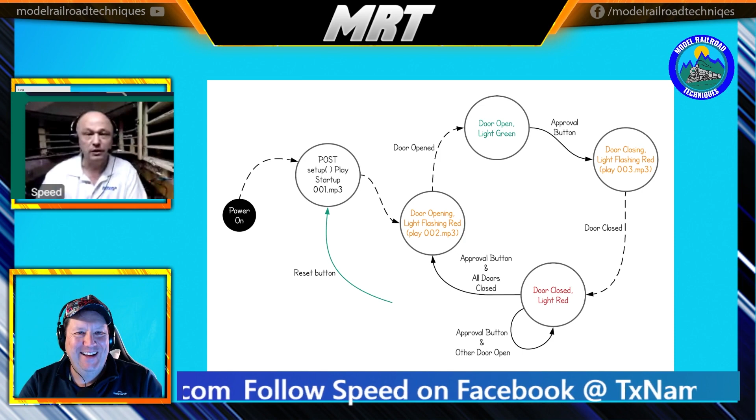Well, so good evening all. I feel quite comfortable here in my NMRA-X studio. Daz even set up Wi-Fi for us. At NMRA-X, I am kind of responsible for the scheduling, so I always put at the bottom of my email, host, scheduler. So if you are willing to give a clinic, you know where to come to.

And we probably schedule clinics out within the next 3 months. We still have slots open for February and March, not knowing when this is going live, but contact me anyway. Probably in the next month or so this will go out, so probably late January, I think. I might grab your email later and we'll sort that out, and I'll put that link below, so if people want to reach out to you, we'll go from there.

Well, we have to preface the giving of clinics - it's going to cost you an operating session. So for an operating session, I'm willing to drive to places. Anything technology-wise, anything even from soldering - willing to teach people how to solder, how to open up an Arduino out of a box, how to change the blinking light to something that blinks a little faster, make a traffic light, make an arc welder, do a little fireplace. JMRI, how to set it up for operations, how to get your turnouts to move - all those kind of things that people think are hard to do.

Well, we go the step-by-step way to show you - an introduction to electronics. Yeah, sure.

And also I see you're the treasurer of the Lone Star division of the NMRA in the United States. So shameless plug, away you go if you want to push the Lone Star. Well, it's the place to be, right? Hot in the summer and not so hot in the winter, but no snow.

A bit like Adelaide then, like South Australia anyway. Definitely no snow, just dreary and cold. But so lovely. We moved here from Boston as soon as we could, literally. Yeah, okay, that's northeast, isn't it? So they'd be very cold right now.

So, okay, how long have you been sort of involved with the Lone Star? 3 years as treasurer, 3 terms as treasurer. When I moved from New England down here, within the first year I was involved in the local division. So that would have been now 10 years already. Wow, amazing how time flies.

Speed, you obviously go by another first name, which I promised I'm not going to mention here, but you said you'd give us the backstory. I like Speed Muller, I think that's got a certain sort of edge to it. So what's the little backstory to that?

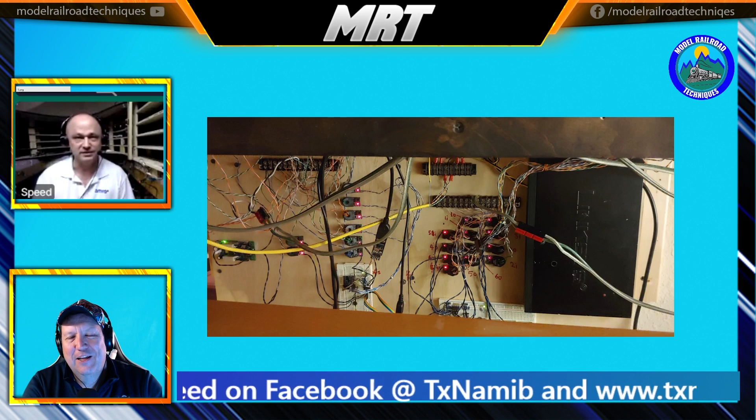So I was born in Southern Africa as Gert Johannes Muller. But in America, they shorten Gertrude into Gert, so all my junk mail shows up with an MS or MRS in front of it. Not my kind of thing.

So when I moved to Texas, I helped a guy I'd never met before on his S scale layout with JMRI. What I didn't know is that you're not allowed to touch the computer because the dispatcher is the only guy that touches the computer. By the time I had three lines coded in, there was a crowd of people behind me, and he tapped me on my shoulder and said, I can understand that your name is a problem here, but you can type faster than we can read.

We're going to call you Speed. So the crowd took that as the introduction: 'Hey, say hi to Speed.' And it stuck. I like that. So from now on, that's what I've been told to call you, I think it was Gordy who said make sure you call him Speed, and I will honour that. So that's a great little story.

Thank you. So, history. I'd like to know people's history in the hobby, sort of where you've come from to where you are now. Well, in Southern Africa we had these things called sanctions, and not sure how, by hook or crook, we always got the products from Lima in Italy, and they would make things like the Blue Train and the locomotives and cars that go in and out of Cape Town.

So as a 6-year-old, you get a present like that under the Christmas tree. Mine was a little harder than that because we didn't have electricity - we would only have a generator for an hour a night. And if you're in boarding school, you don't have any trains or toys there either, so only on weekends you get 2 hours, Saturday night and Sunday night. That's how mine started.

Went to college in South Africa - trains kind of stayed at home. We built a new house on the ranch, so I got a big room in the old house and built a big layout there with pantographs, because everybody knows the Blue Train is an electric train. I spent probably most of my life in model railroading, building pantographs and making trains run off overhead wires.

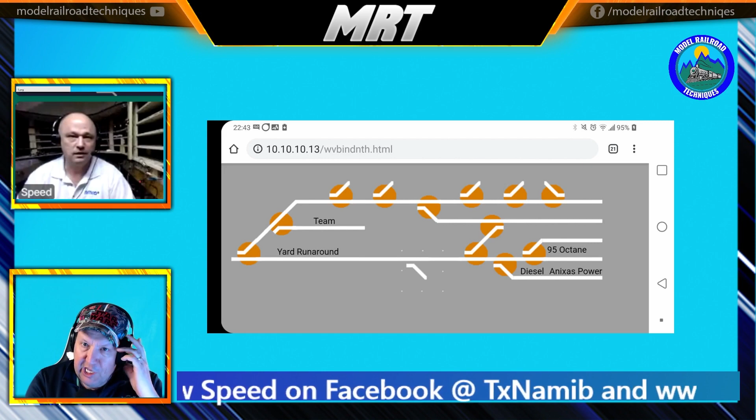So N-scale, more out of necessity, because you didn't have the size of space you'd need for a pantograph layout, as you were saying. So what's the name of your current layout that you're building, and tell us a little bit about that.

It's TxNamib now, and it's in a room that was added to the home before we moved in, on top of a 2-car garage. So I have 20 by 20 feet plus the entrance in the hallway. There are some pictures of the entrance as well as the room, and it's a 2-deck layout.

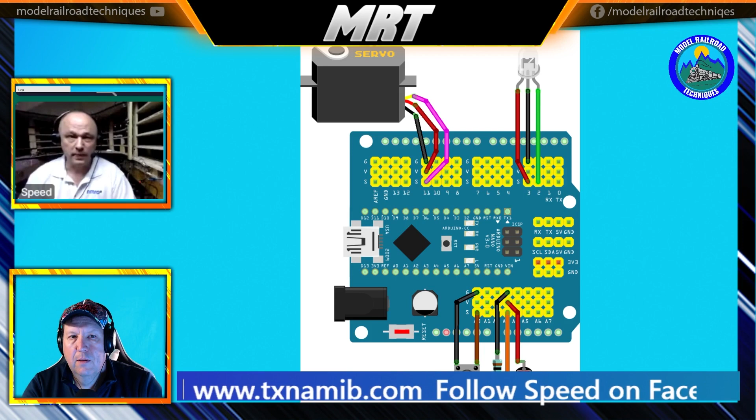I'm sitting inside the helix, which is a 4x8 plywood sheet cut with a hole in the middle, and I always wanted the dispatcher to sit here. So in front of me are 2 monitors - but we're fortunate enough now with today's technology that we're actually using remote dispatchers just like the real railroads do.

So single main line everywhere except for in the helix, because it takes the longest to go between these two towns at the top and the bottom. So I thought, in order to save you some 12 minutes waiting for another guy coming down, how about we get you going on the other main line, like in Southern Africa, left hand running, or probably Australia too, right?

Correct, yep. So everywhere you split somewhere on the siding, you take the left side. Enough staging on both ends of the railroad so that we can park 16 trains in Walvis Bay and 24 trains in Windhoek, in case we get a guest operator that just wants to run a train through the layout. Sure. But it's built and designed for operations, and therefore the scenery is coming a little later.

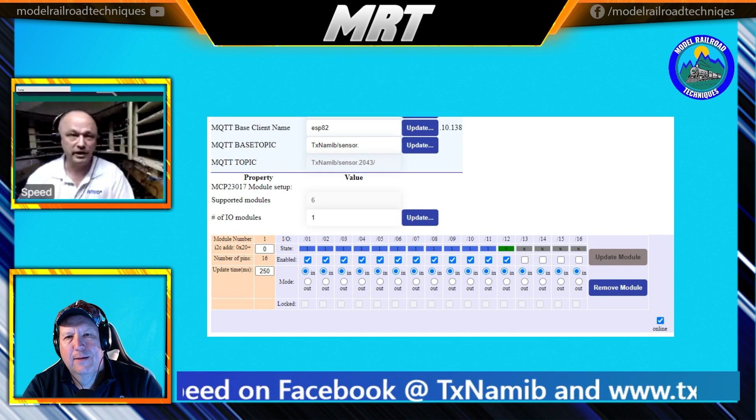Like Daz asked for some pictures and things, and I was like, well, this is going to be a dry interview if there's no pictures of scenery. So most of the scenery that you see in the slides coming by were actually done by friends of mine. It's not my handiwork, it's their skills that I'm using.

Sure. So, what's the DCC system? What are you looking at?

Yeah, okay, fair enough. So I sort of gathered it was NCE because what's the BD20s that you're using for occupancy detection. So yes, and that's inherent to obviously NCE, so which is great.

So obviously you've touched on JMRI a little bit. I know we're getting ahead of ourselves here. So obviously the layout is purely built for operations in mind. So we'll talk about the virtual and the remote operations, which is something you're quite heavily into as well, as my understanding. So take the COVID rubbish out of it.

What does a typical operations session look like pre-March of this year? So how many operators and how do you go about running your trains?

So the operation started beginning of November last year, because Houston, the DFW area, and Tulsa has a 3-year rotation. And I realized that if you don't sign up for one of these events to host, then you might not get something done. So last April, I decided that this November is going to be the chance to invite people over. And I literally slept 4 hours a night until November the 2nd.

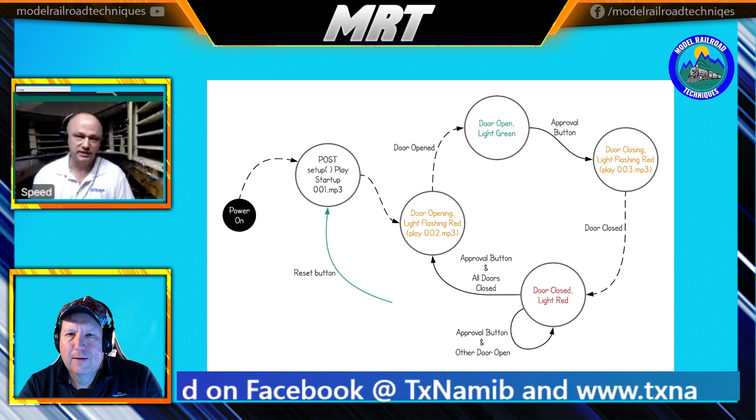You are going to be a yard guy. So that was the initial design. There's about 3 or 4 towns and industrial areas that we have not completed yet. So I could eventually have maybe up to 8 operators.

Wow. And then we also have the staging yards that's not in use yet, where we run trains from outside the layout, coming from South Africa to a place on the layout where you can then either drop the train or do some work. Sure. So it was planned to maybe maximum 8 guys and then a dispatcher here in the helix to control the system.

Yeah, lovely. So the method of moving the trains around is JMRI operations, or is that how you're doing it?

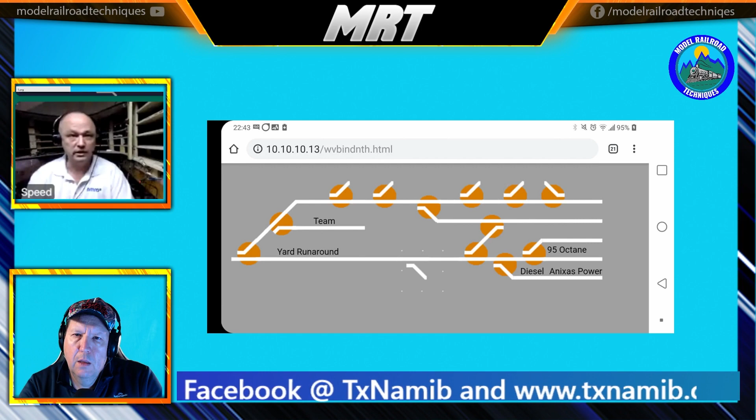With the switch lists I'm working on a car forwarding system where you would select your skill level when you walk in. So if you're a novice, then you will only pick up green cars with trailing point moves. And if you are an expert at this, then you would have to turn a car around in the town prior so that you could deliver it with the left door at the platform.

Right. So that whole camera system is still in development. Yeah, and until then, to make things run and test out turnouts and things, I have a computer-typed switch list, which basically tells you what car to pick up where, and in the same line where you have to deliver it.

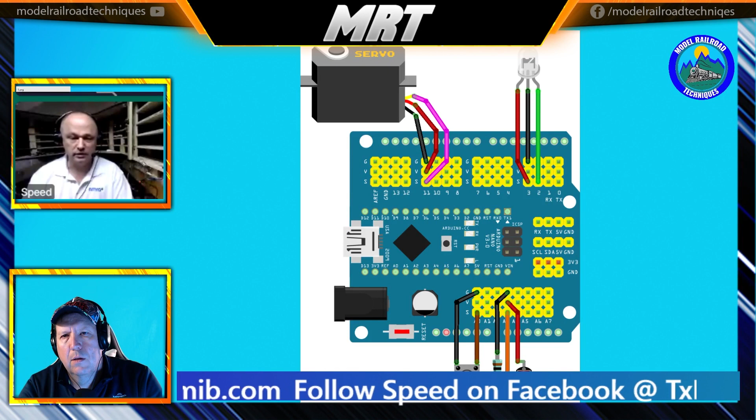So it's one of those brain teasers where you show up at a town and it says -3, because you have to drop 3 cars, but it doesn't tell you which 3, because earlier up in the list it showed where those cars were going.

But by the second session, you're over that fear and you know how it works. The intent is to move away from paperwork so that the only thing in your hand is the throttle, and you control and witness everything on the tablet in front of you. The tablet knows that train 101 and train 401 are in this town, so you select which train and it shows you which cars you need to move when you show up.

No, it's all standalone. The switch lists I give people now are all made out of Google Sheets, so I just print a new set and hand them out. I actually restaged the whole layout to time 0, so if you come here and operate the same position 4 times in a row, you're going to move the same cars 4 times. But by rotating you through the layout, because I know where you were last time, it's going to take 3 or 4 months before you do the first position again.

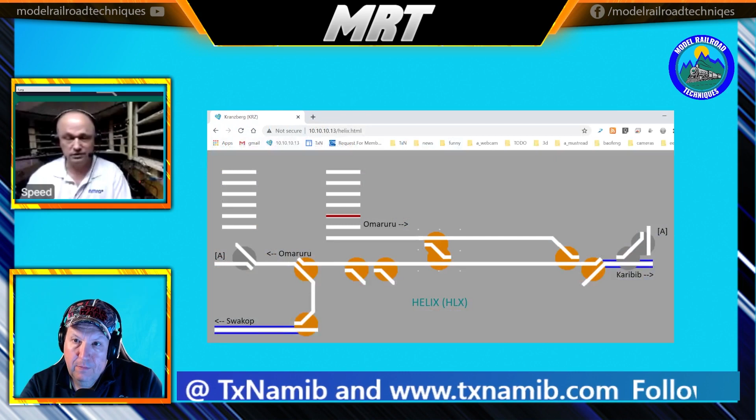And if there's anything like me, I would have forgotten by then, so I'd be asking what was going where. But the cars do go to places where they would have gone - it's not just any box car or tank car showing up at a milk factory. The appropriate cars are moved to the appropriate locations.

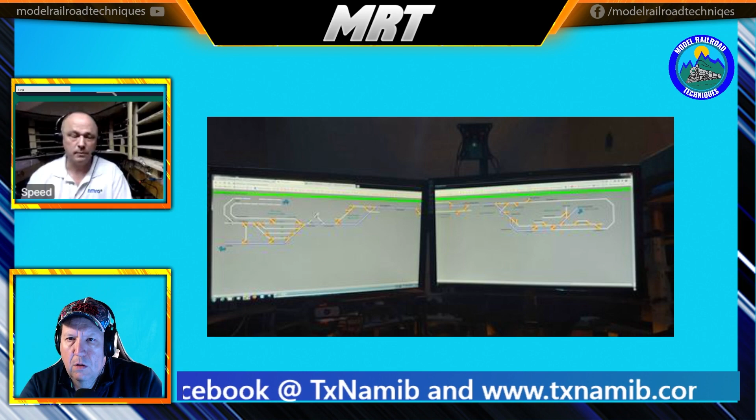Everything can be remotely controlled, but every town has its own little Android tablet that is looking at a website running on a Raspberry Pi. We're actually not using JMRI to control the turnouts, because the JavaScript code is sending out what we call MQTT messages - MQTT is an established protocol out there - and we're using that to talk to little Wi-Fi boards, which I think is up in the picture right now, to move turnouts.

I was actually going to ask you about your signaling system in the next 20 minutes or so. I just stumbled across this on your website this morning, and I thought, someone - I think it was Gordy who mentioned it. No, it was Martin Jenkins who mentioned it, saying that was rather a large rabbit hole for him to go down.

Well, I can show you how to do it for $1.50. Wow, that's fantastic.

So virtual and remote operations - well, obviously they're one and the same, as I understand it. What are you doing within that space? Obviously best case scenario was pre-COVID. You started operations in November. My understanding is you're a bit of a leader in this space, somewhere between you and David Aberles in that sort of vein, so how are you operating your layout?

I don't know about the leader part, but we at least have the dispatcher completely remote now, and we're setting the cameras up so you could also run the trains, slow them down, and stop them in places. What I always tell people is that operations is half the time you pick up cars and half the time you set out cars. Now, we all know that if you can back into a car, see it on a camera, and change the throttle to forward, then that car is hooked.

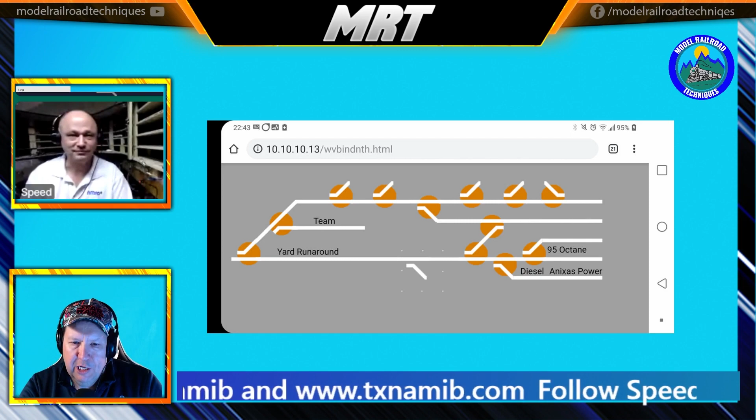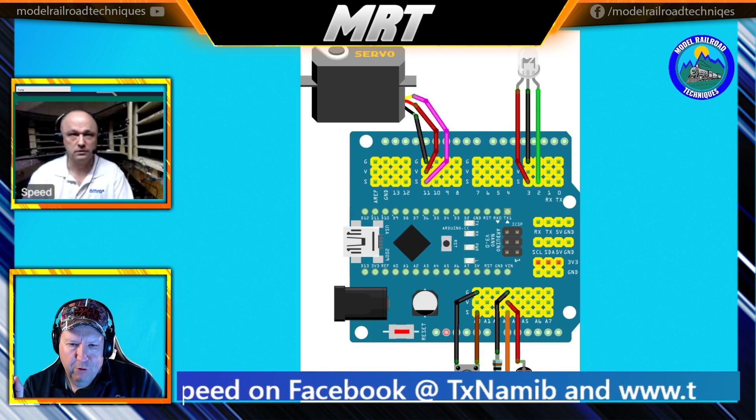So, in regards to the CCTV that you're using, there seems to be 3 schools of thought. I've seen the guys and girls at the Silicon Valley lines over in LA, over on the West Coast, closer to San Francisco I believe. So they seem to be doing camera cars, a flatbed wagon that's getting pushed around by the locomotive, or a dummy sort of locomotive. And then Marty is obviously looking at cameras of rail fanning type areas. And then following trains more around within JMRI, or whatever's tracking your occupancy, or a mixture of both.

So where's your layout sitting within that scope? So with my cameras monitoring the cars, cameras next to the track that's reading the cars as they come by, and cameras in the ceiling to track where that white roofed car is going all through the town. I would have it, at least that part already done, where you can monitor it from afar.

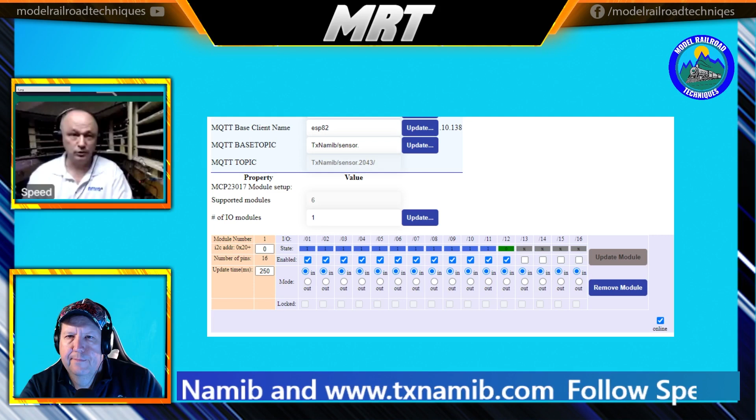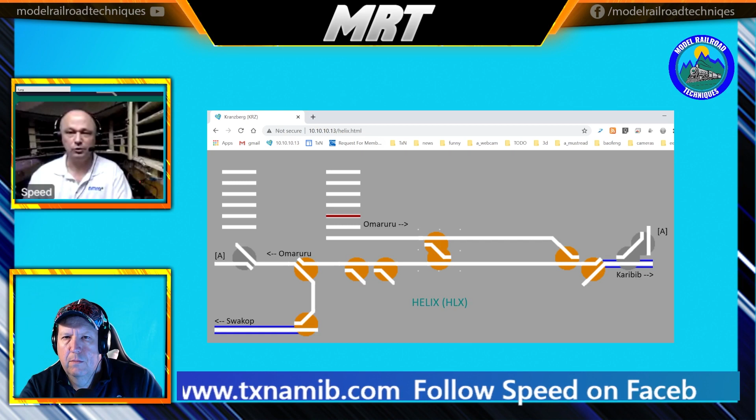Me and Brad were just discussing that this morning, where the question is quality versus—what's the word—do you want the nicest picture, or do you want the fastest picture? Some people want to see the scenery as they ride their train through the layout, so you need really good quality. But if you are operating the engine back and forth and need to stop it, then you need the frames to show up quicker, so that you have a feeling of how it moves. A beautiful picture every 10 seconds is not sufficient to run a train.

So a mixture of both, to answer the question, is what I'm gonna say. I run a program called Train Controller, which is the German brand. That's what I use to run through web servers. I've only just started touching the surface with the whole remote operation side of things.

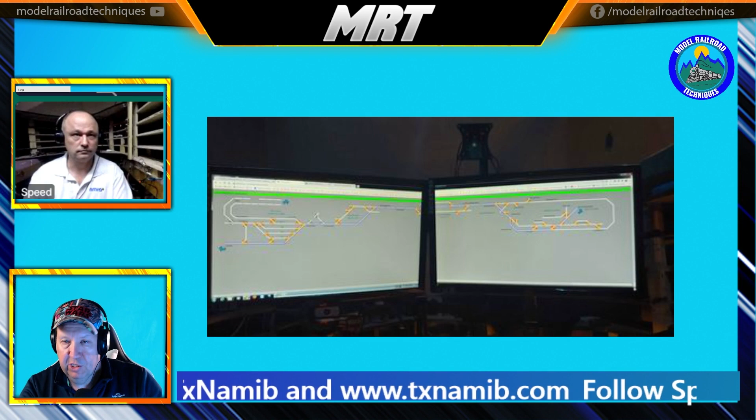I have sorted out a way that I can, because I run a bit similar to you. They're all web browsers, I don't have any control panels. They're all sort of soft control panels, no wiring to them. They're just a PC that sits on my local area network. I have worked out a way how we use the WAN side of things, so I can access my layout's computer from the outside world, so to speak. So that's sort of where I'm at.

I'm just starting to dabble around with some ESP32s, which young Marty got me into. I've also tried the Raspberry Pis as well. So which way I'm going to go with those, I'm not sure at this point.

The benefit of the MQTT system is that you add an external bridge to any other MQTT broker or server in the world, and then all those commands for changing turnouts and signals and picking up trains is automatically broadcasted to another server. So if you bring up the same web page on your computer, like the image shown now, then you can control the same turnouts that I can on the inside here.

So obviously Arduino is another sort of passion of yours. Besides the ESP32 cams, you dabble in Arduino IDE, which you flash the drives that way. I'm not very au fait with what you can actually do with Arduino, I'm just sort of scratching the surface with what can be done, just very, very beginner. So in layman's terms, for someone like myself who has no idea about it, what sort of things are you looking at with Arduino for the beginner to sink their teeth into? There's all the flashing light things.

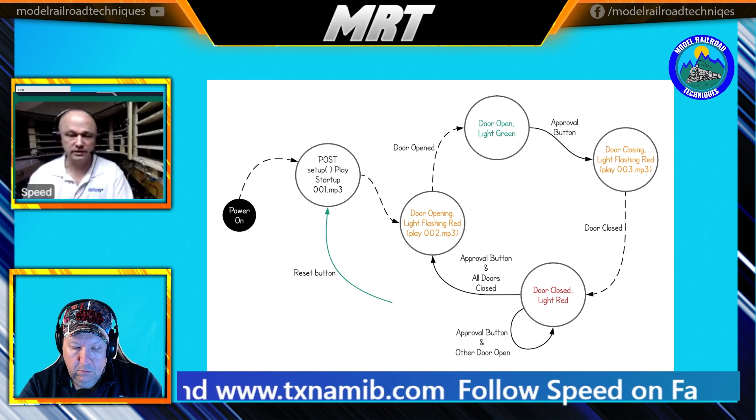There's recording light levels, temperature sensing, occupancy sensing, or anything else you want to monitor. You could do it with a little Arduino, which is just a tiny microprocessor that probably runs some 8-bit code.

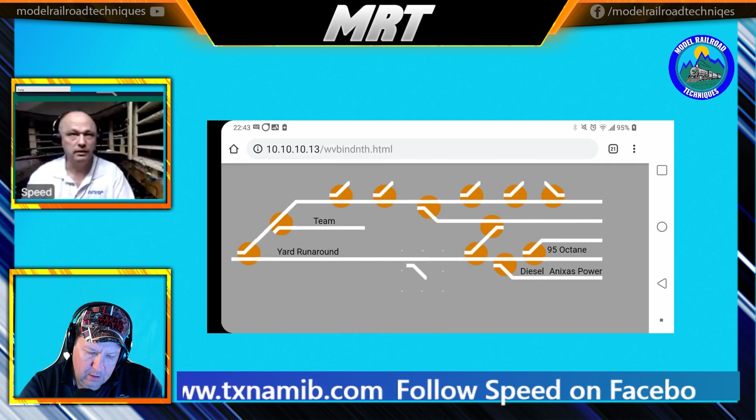So that's the simple thing. The unfortunate truth is that it's just C and C++ code. So if you really want to have some fun with it, go to the library and get a book on Introduction to C or Introduction to C++, and that will take you a lot further than you expected.

In any Arduino clinic that I teach beginners, the first thing you do is make sure the software is installed, and the device driver is installed when you plug it in, so you get a COM port. Then you'll notice the Arduino starts blinking by default—that's the application that's already loaded.

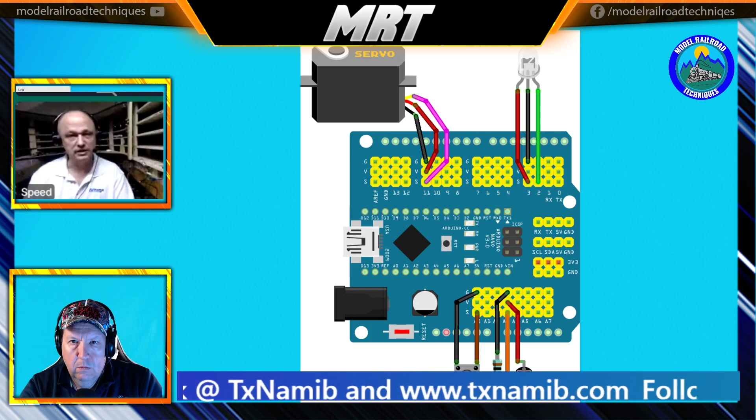So the first thing we do is change how it blinks—is it on for 2 seconds and off for a second, or on for a quarter second and off for 2 seconds, whichever way. Then we do the high five once you've uploaded that code change—you are now officially an embedded programmer. Well, not really, but you did program an embedded system.

Then when we go to the advanced class, we have to convince people that the delay function is preventing them from using all 15 pins to do separate things, because if you delay one LED by a second, all the others are also delayed. So you have to switch to a polling approach where you ask, is it time to change the LED? That's easy with the millis function.

Unfortunately, only 1% of the people who use an Arduino would ever write a line of code, so we have to keep that in mind—we don't teach everybody how to do Arduino if they have no intention of writing C programs. But you've got to keep them interested and show them how to upload programs so they can at least find a use for it. And you also have to keep the 1% happy, because they're the guys writing the code for other people to use.

So what do you do—are you a programmer by trade? Is that how you learned all this, or did you literally go to the library and start reading these books and teach yourself?

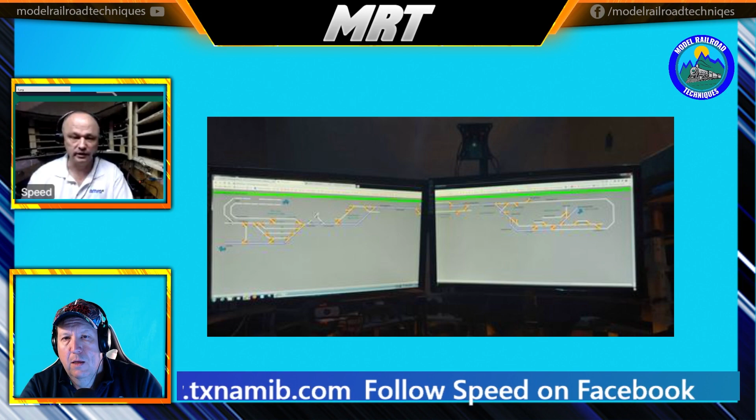I'm an electronic engineer by degree, and I always tell people that if you go to a Southern African university, they don't teach you English writing or language arts or history—you're only taught science, math, and engineering. That includes programming, so if you graduate as an electronic engineer, you can write assembly code and C code, and probably Pascal and some Java as well. So that's where I picked it up.

When I went to Boston, I enrolled in a master's degree program for software engineering, which came at the same time the internet exploded. Someone told me to pick a thesis topic in my interest, so instead of writing a server application like an Amazon checkout app that calculates tax and shipping, I decided to make my thesis about the use of RFID underneath tiny N-scale little cars. That's how I stayed in the software world.

When I moved to Texas, my job changed a little from just electronic engineering to systems engineering, where you have to worry about the whole system and make sure all the parts come together.

I'm interested that you bring up RFID because it's something I touched on a number of years ago. Not from the code side, that was my introduction to Arduino, I think, from memory. So are you looking at running RFID on your layout to keep tabs of your wagons, as you wrote your thesis on, or you're not going to go that far with it?

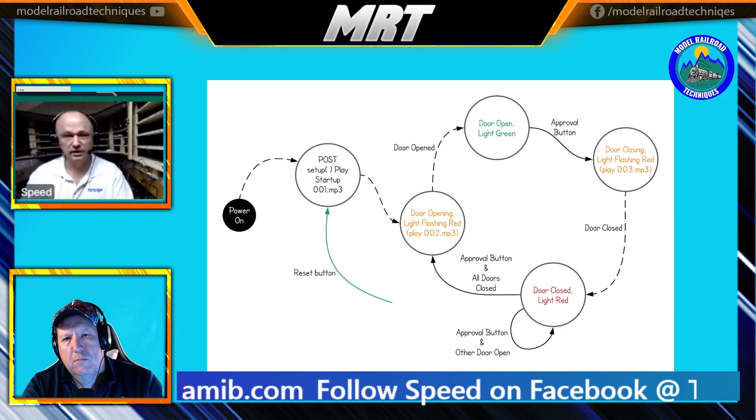No, not anymore, because in N scale we need weight in the cars, right? So there's a metal piece sitting underneath your flat car, and now where do you put the tag? Well, they make these tiny little tags that they implant in animals, a tiny little bead that sits lengthways under your skin. But in order to match up with the reader that sits horizontal underneath your railroad track, you need to have the bead point down. And how do you take a 6 millimeter long bead and point it down on a flat car in N scale? So that's kind of limiting.

And it's not inexpensive. It's not a cheap part of the thing. The tags themselves are fairly inexpensive - if you buy 10,000, they're a couple of pennies. But you also need the readers, and you have to integrate all the readers into something else that sends the data to a computer.

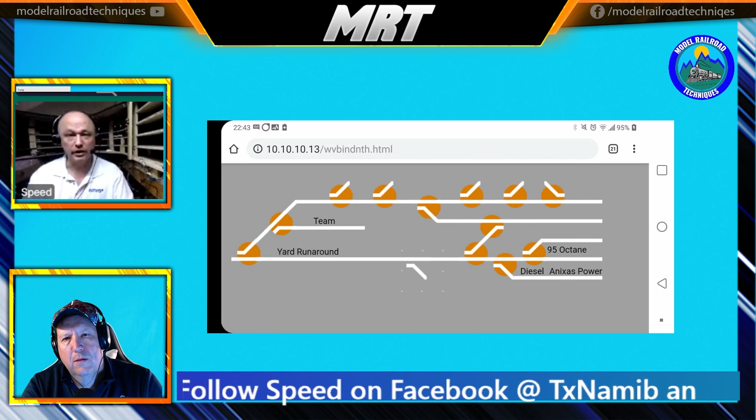Correct. And I found that a reader only tells you that the car is there, it doesn't tell you which way it went. So if a car is read at the entrance of a yard, you still don't know if it came or went - you have to read it again some other time. But if you're using a camera system, you take 2 photos a second apart, and you know exactly which way the car went, because the second photo shows the car went to the right. So that's very interesting.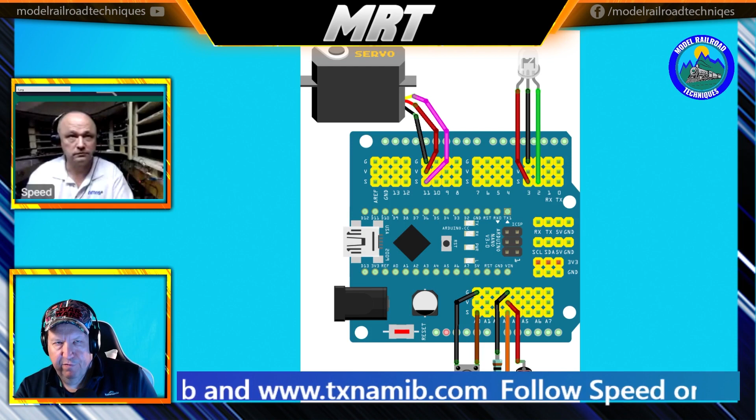Yeah, as I said, I sort of abandoned it purely on the back of having to buy, as you point out, 10,000 of the little beads for a few hundred wagons. So from my point of view in Australia, it was a little bit cost prohibitive, and I went down another rabbit hole. So I left it there - I only ever bought, I think, one of the sensors, and left it at that.

So interesting - the inexpensive systems also run in the hundreds of kilohertz, and that interferes with DCC. So you have to prevent current from flowing over the sensor, otherwise you just get random readings. So you've got to cut the track on both rails right above the sensor, so there's no current flowing over it. You only have that problem when the engine comes over, but I don't care what the engine's number is, I care about all the cars behind it. So if you had a lighted passenger car, then you'd get current flowing over it too - there's also that part you need to worry about.

I never even considered that. As I said, I never got that far with it, but I left it there in the bottom of the rabbit hole, as Marty says.

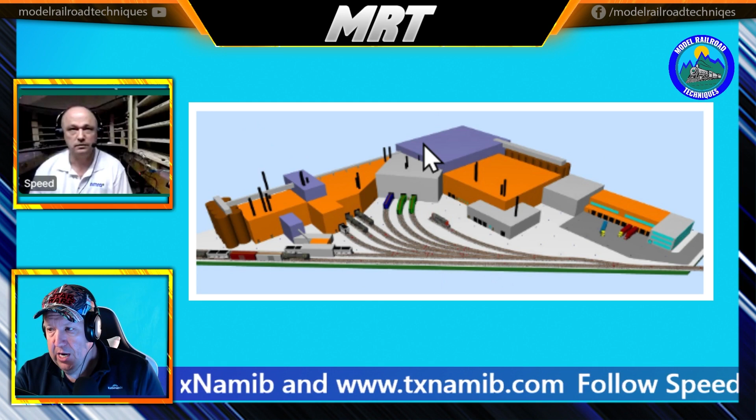So you're talking about the Molson Beer Brewery? Correct. That is Lloyd Hensch's layout in St. Eugene, Canada. And he decided to have a complicated door opening system, so that when someone brings a car to be delivered to the beer brewery, we had this whole plan to have it elaborate, where you detect if a train is coming in on which track, and then it would show you a flashing red light to say we're calling the attendant, and then the supervisor would give permission, and then the light would change color, and the door would open up, going from red to green.

Sure, and I think you have a video of it. I do, I'll just quickly put that up, so let me get that sorted.

So people won't be able to hear the sound, but it's actually making a little horn sound as that right-hand door's going up. And then obviously it turns green. So green light when it's up, and when it goes down, it's making a different kind of sound.

There's also a big switch if you want to turn the sound on and off and don't want to be bothered by it. And I kept telling him he's got to close the door because there's going to be beer bottles rolling out there if he leaves it like that. But that's right, that's right - just tongue in cheek.

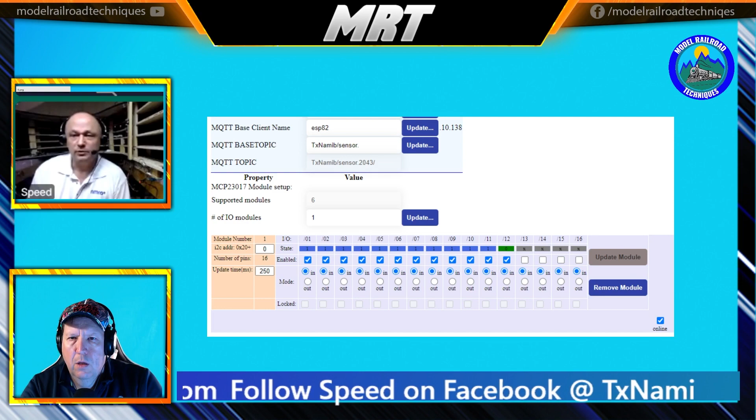And when are they going to do that? Because if you just start writing 200 lines of code and then you change your mind, well, you might have to delete 80 of those lines now because you put them in the wrong spot, at the wrong time, for doing something at the wrong time. So we're trying to get people to also learn about system engineering and follow their requests for doing things in that same fashion.

So quite often, I'm assuming you're speaking from experience - someone says 'I want to go from A to B', but then halfway through your coding, they're adding another C and E and F. That would get rather annoying.

So that's fine. So another little rabbit hole I see that you've gone down, and we spoke about it briefly before, and you've explained it a little bit more to me. Let me scale this photo a little bit - for some reason, it's all blown out.

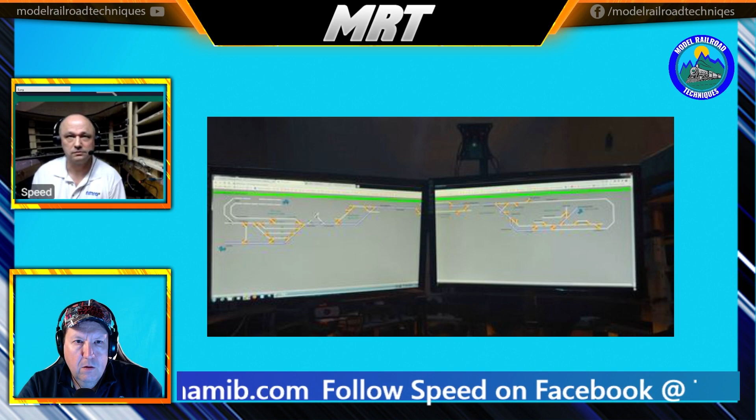But it's very easy in JMRI to create any virtual anything, a virtual turnout, a virtual sensor, or a virtual signal, and then you can write a few lines of code to say, if that signal changes aspect or if that head changes color, then run this piece of code. And since the Python or Jython inside JMRI has access to all the Python things in the world too, you can email your grandma when the Molson Brewery door opens up. You can send a text message to someone else when two turnouts are in the crossover position. So you literally have the sky as the limit for doing things.

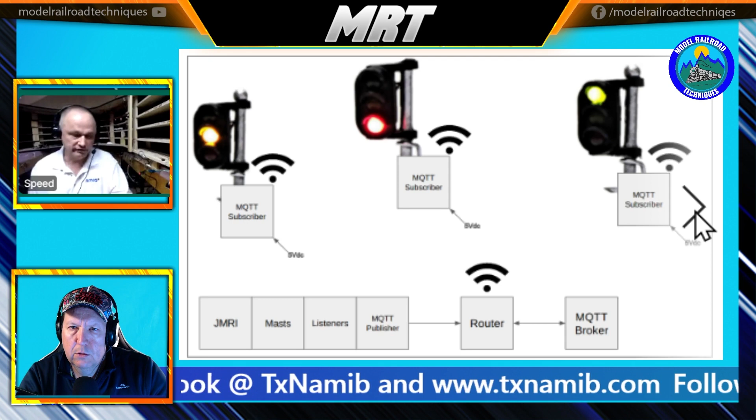So in this diagram here, you need a router wirelessly, or you could have Arduinos with networking shields on top of them, and then it's all wired. So it doesn't necessarily have to be wireless. It's just the benefit with wireless is that you could use these ESP8266 devices, and they cost $1.50 now. So that's them there in that photo, is it? Yep, like you showed there.

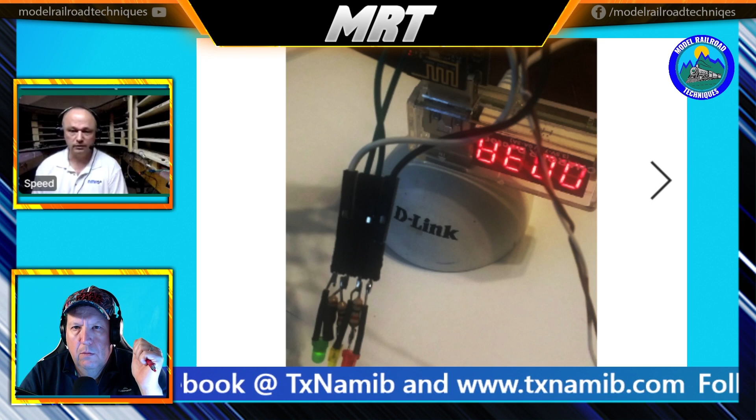So in that diagram, it shows that every signal has its own little ESP8266, which you use the same Arduino IDE to write the code for and program them. And the MQTT in the old days was called a broker. After version 3.11, it's now a server. Imagine it's like an email server, but it only has one email for every email address. So every topic only has one message in it, and when you put a new message in a topic, it replaces it. So it would be nice if we all had just one message in our inboxes, right?

So every little ESP subscribes to either one or more email addresses or MQTT topics. And when you put for topic 01, you put stop in there, or you put clear in there, or you put approach in there, then that signal mast would then show the appropriate stop or clear mast to you.

So it's not just JMRI that says stop, clear, or approach, or dark, or medium approach, and all of the other 200 ones. You also need to have some code where you say which heads are on and what color at the time. These guys above my shoulder here are those NeoPixel lights, and they could go any one of, I think, 16 million colors. The good news is you don't need 16 million colors. You just need dark, and you need lunar, and yellow, and red, and green. And sometimes they should be flashing. So that's how simple the system is.

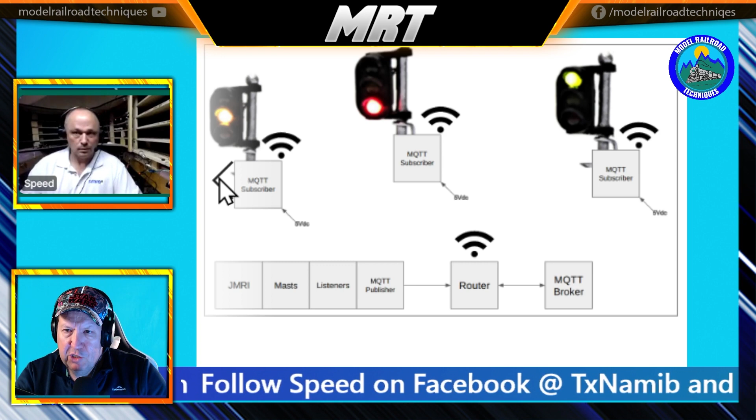Cool, so well Speed, thank you so much for chatting with me - your evening over there, and it's just ticked over lunchtime over my neck of the woods. So fascinating, the electronic side of things.

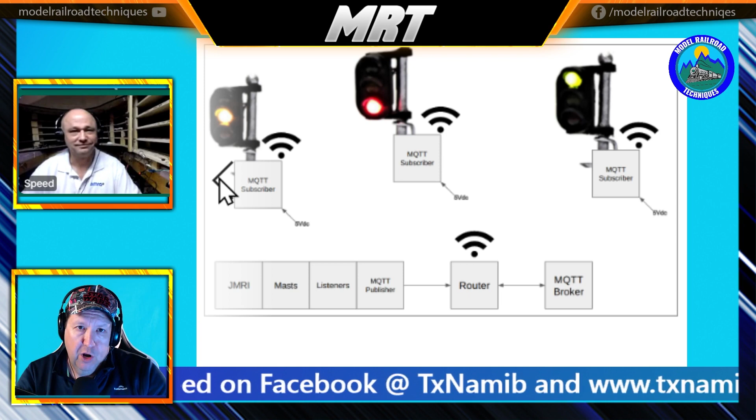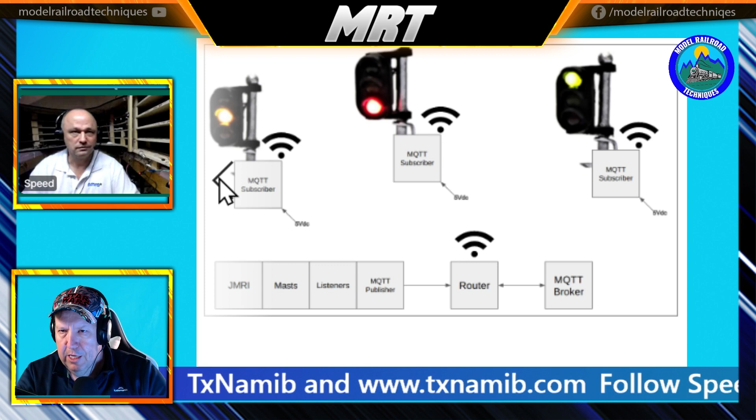Your mind is a little bit like David Barraza's, if you've dealt with that gentleman as well. He's into different types of things, but his wiring is quite interesting. He's an LCC expert, so it's very interesting - you're going wireless, everything's wired for him. So obviously quite interesting, polar opposites, but sort of doing very similar things, I suppose, in some regards.

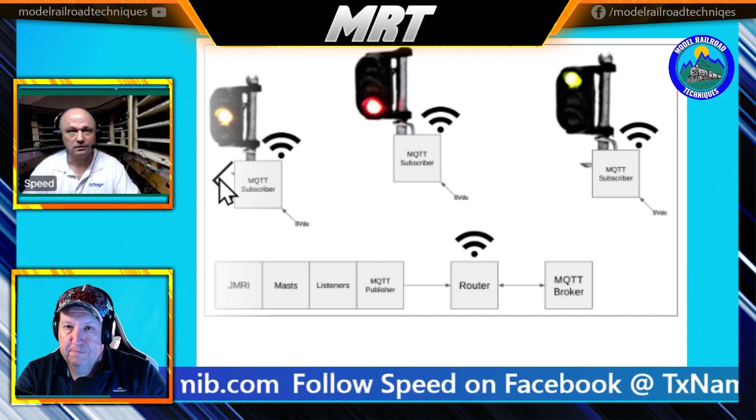Well, so it's been fascinating, so thank you so much for coming and chatting with me tonight. Thank you very much, it's been fun.